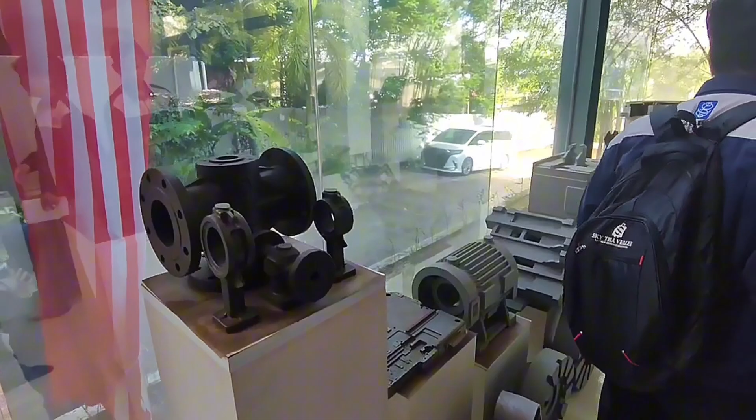Sama Mahir Sendirian Berhad is a metal casting and CNC machining company in Johor with over 50 years of engineering expertise. And this is Tan Sri Raitan, the Managing Director of Sama Mahir Sendirian Berhad. Sama Mahir manufactures a wide range of cast metal products including pump casings, impellers, motor housings and other precision engineering industrial components, and many more.

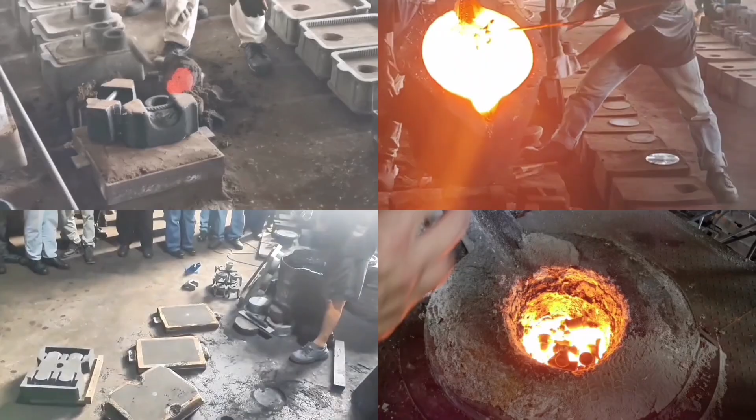Next, let's look at the processes involved in the sand casting operation. Safety technique. 1. Wear proper personal protective equipment, PPE. Gloves protect hands from burns when handling hot metal ladles and castings. Safety shoes protect against falling objects and accidental metal spills.

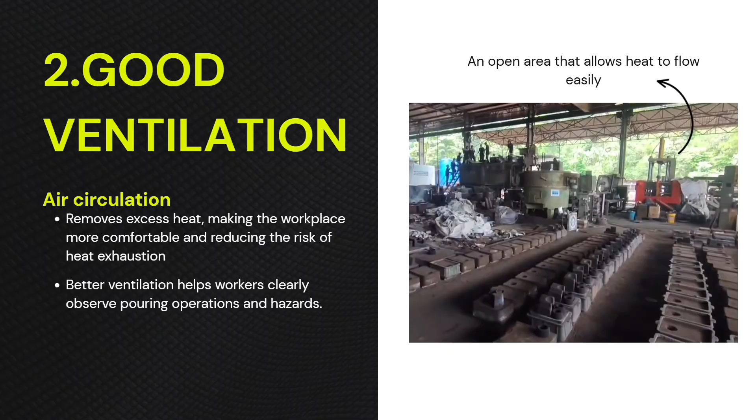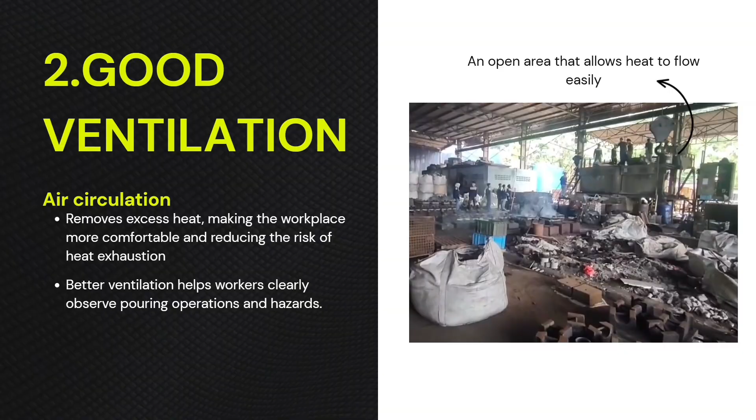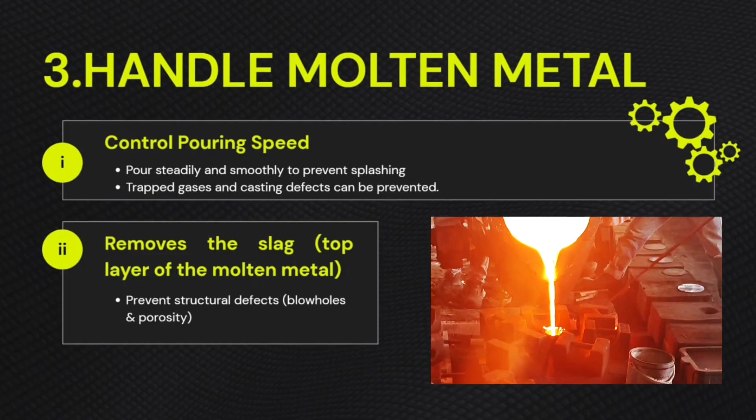Good ventilation. First, it removes excess heat, making the workplace more comfortable and reducing the risk of heat exhaustion. Other than that, it also helps workers clearly observe pouring operations and hazards. Number 3 is handle molten metal. First, control pouring speed. Pour steadily and smoothly to prevent splashing, so trapped gases and casting defects can be prevented. Number 2, remove the slag to prevent structural defects.

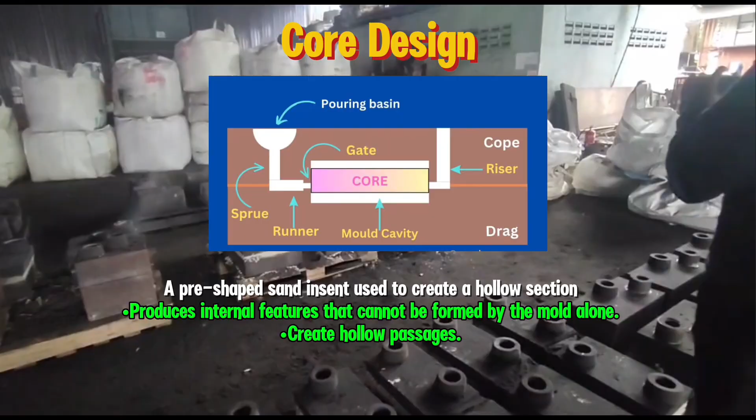First, core design. A pre-shaped sand insert used to create a hollow section. It produces internal features that cannot be formed by the mold alone and also creates hollow passages. Number 2, gating system design. The network of channels that guides molten metal from the pouring basin into the mold cavity, controls the flow rate of molten metal and ensures complete filling of the mold cavity.

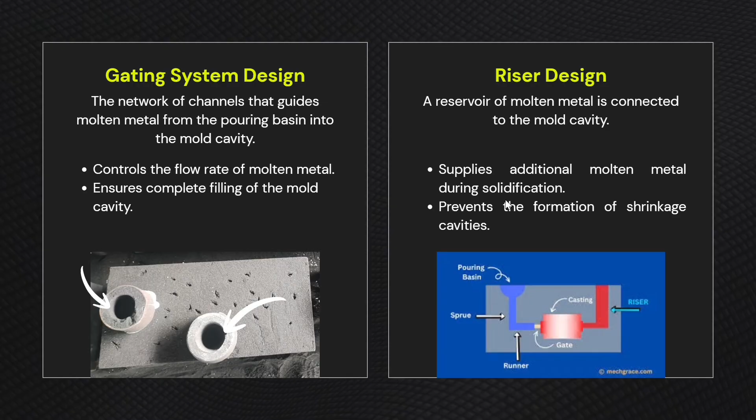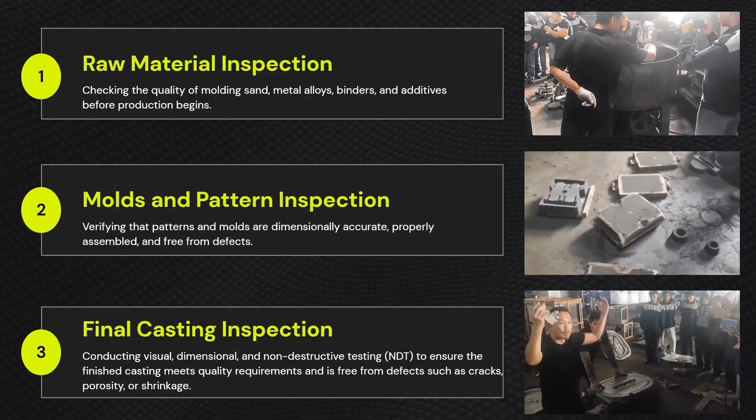Number 3, riser design. A reservoir of molten metal connected to the mold cavity supplies additional molten metal during solidification to prevent the formation of shrinkage cavities. For quality assurance, there are 3 common activities in sand casting. First is raw material inspection. Before the casting process begins, all raw materials such as molding sand and additives are checked. This is important to make sure the materials are in good condition and suitable for production.

Second is mold and pattern inspection. In this step, the patterns and mold are checked before pouring molten metal. The purpose is to ensure they are accurate in size and shape, properly assembled and free from any damage or defects. A good mold is very important to produce a high quality casting.

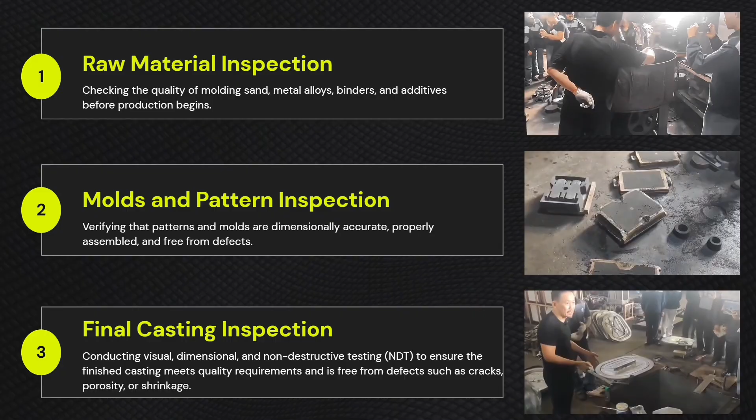Lastly is final casting inspection. After the casting process is completed, the final product is inspected. This includes visual inspection to check for surface defects like cracks or holes, dimensional checking to ensure correct size, and sometimes non-destructive testing to detect hidden internal defects such as porosity or shrinkage.

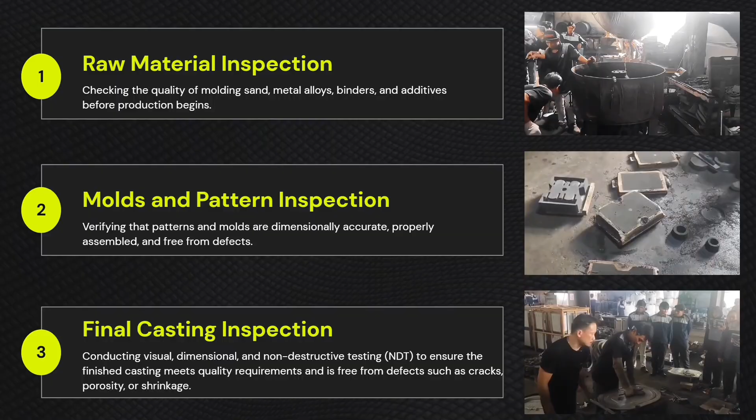In conclusion, this quality assurance helps ensure that the products produced at Sama Mahir are high in quality, meet specifications, and have fewer defects. And now, the problems faced by the company. First is holes from cooling metal, which happens since metal naturally shrinks as it cools down and solidifies. If the riser is designed too small or cools down too quickly, it cannot supply enough liquid metal. So this lack of metal causes internal shrinkage holes and creates weak spots inside the product.

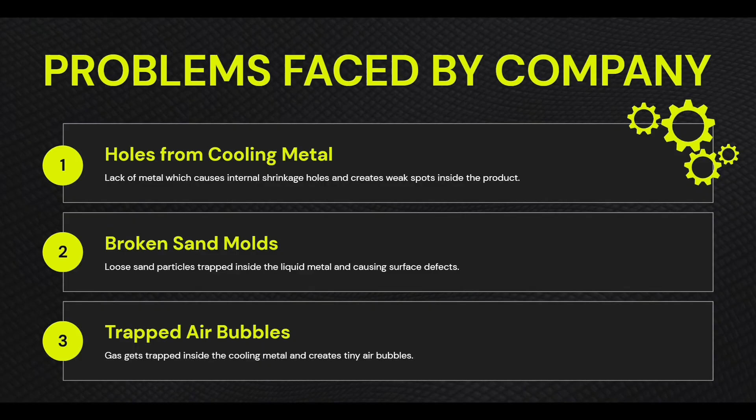Second is broken sand molds. If the gating system is poorly designed, the liquid metal will rush into the mold too quickly and roughly. This violent flow can wash away pieces of the sand mold or core, trapping loose sand particles inside the liquid metal and causing surface defects. The last one is trapped air bubbles. The extreme heat of the metal causes chemicals and moisture in the sand mold to turn into gas. If this gas cannot escape through the mold venting system quickly enough, it gets trapped inside the cooling metal and creates tiny air bubbles.

So, to face the problems, the first one, holes from cooling metal, the company will make sure the riser is the last part to cool down by using a larger or better designed riser, since this will allow it to continuously feed extra liquid metal into the main mold cavity until the entire product becomes solid. The second one, for the broken sand molds, the company will add stronger binding chemicals to the sand so the mold does not break easily. They also design a smoother gating system so the liquid metal does not rush in too violently.

The last one is trapped air bubbles. This can be solved by creating paths for gas to escape and controlling the temperature. The company pokes tiny vent holes into the sand mold, which allows the hot gases and steam to escape safely into the air instead of getting stuck in the metal.

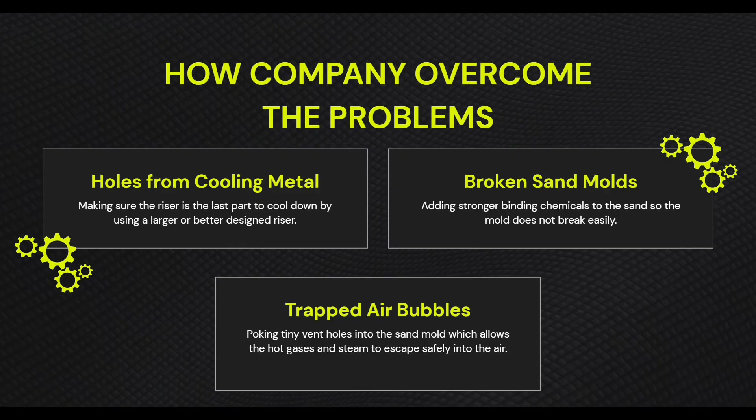From our industrial visit, the improvements that can be made are: the first one is improve quality control. Conduct regular inspection of sand, molds, and finished castings to reduce defects. Second is enhance worker training. Provide training on mold making, pouring techniques, and defect detection to improve skills and product quality for workers.

Lastly is strengthen workplace safety. We have to ensure proper use of PPE, good ventilation, and safe handling procedures for molten metals. This is important to prevent any accidents happening on site.